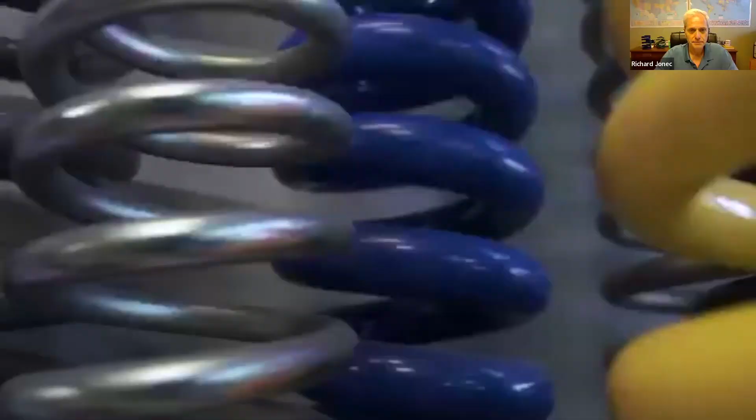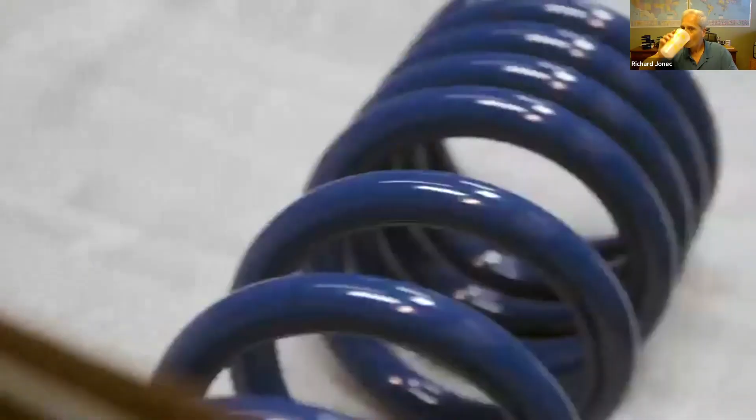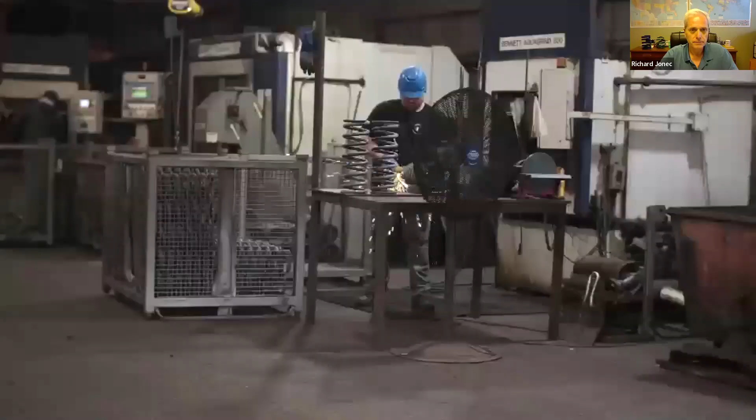With the experience and expertise to design and engineer custom springs to meet their customers' specific requirements, the next company we visited provides a level of service that is unparalleled in the spring industry. To learn more, we visited Houston, Texas, and met with Coiling Technologies. Established in 1976, Coiling Technologies utilizes reliable, fast, and cost-effective technologies to design and engineer custom springs. They can also assist in choosing the best material for your specific application.

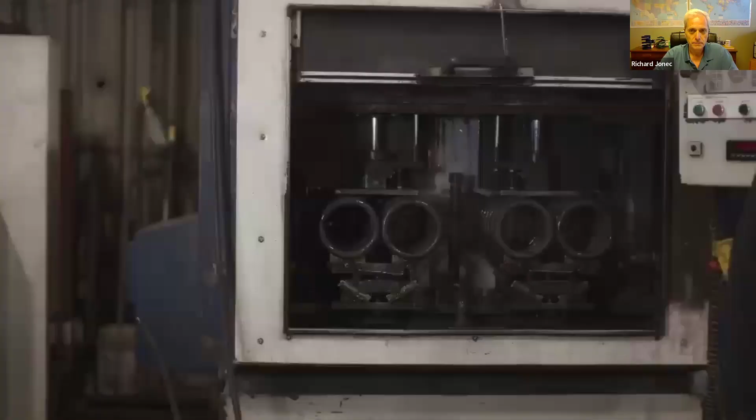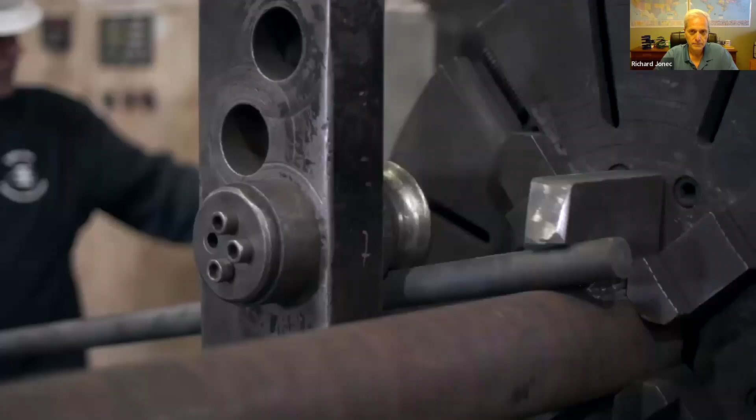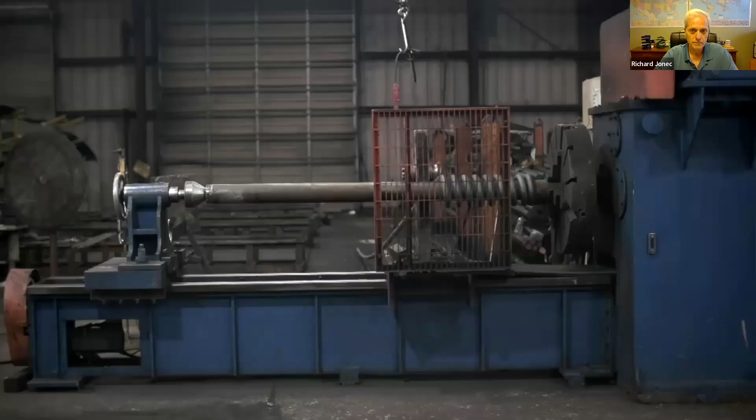Hi, I'm Roger Holman. I own Coiling Technologies. We are a spring manufacturer located in Houston, Texas. Family business has been around since 1976. Our company supplies springs all over the world, in a wide range, from small to very large bars. We service industries that would surprise most people. We cover almost every industry in the country. Springs are in everything from small to large, things you would never think of. It's really kind of amazing, the products that we supply to people.

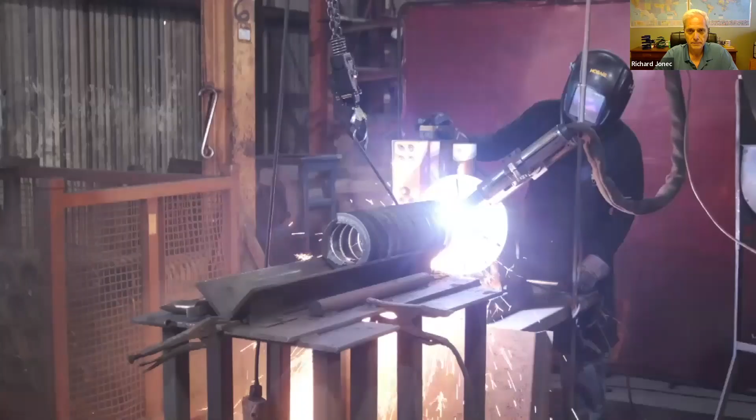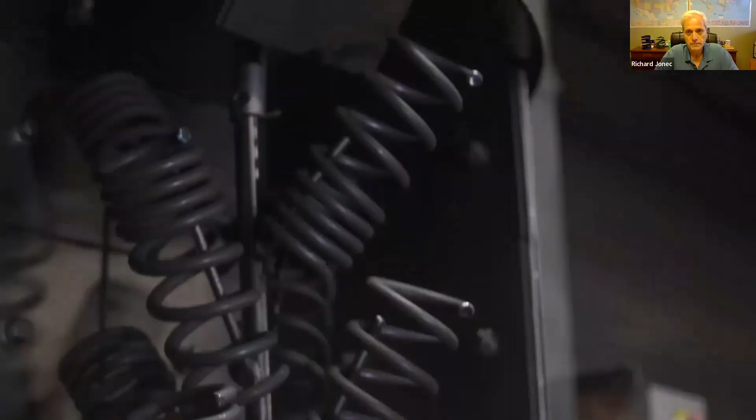Their core competence includes both large and small custom-made compression springs, disc springs, extension springs, torsion springs, and wave springs. Their quality management system is also ISO 9001:2015 certified by DNV, and their rejection rate is less than 1%.

Manufacture springs and supply springs on an OEM basis. We supply springs that are custom made, engineered in-house, designed. We provide programs to all of our customers that include Kanban, blanket orders. We provide a host of coatings and in-process adaptations that help enhance the cycle life and performance of our springs, and we provide these to all industries in the United States.

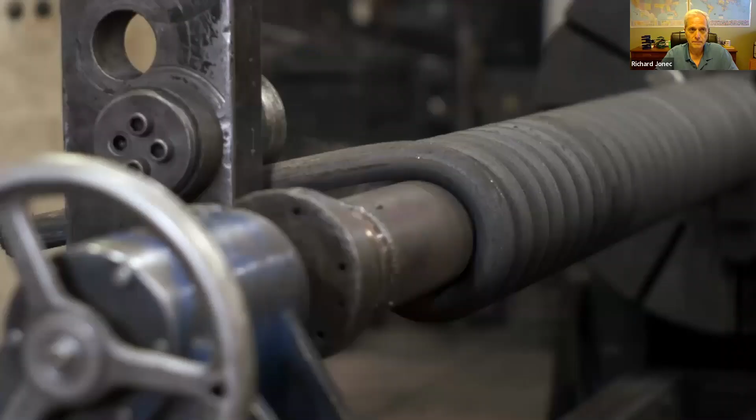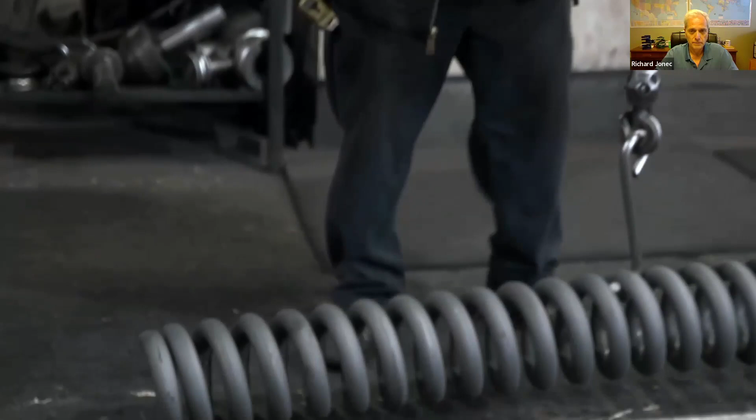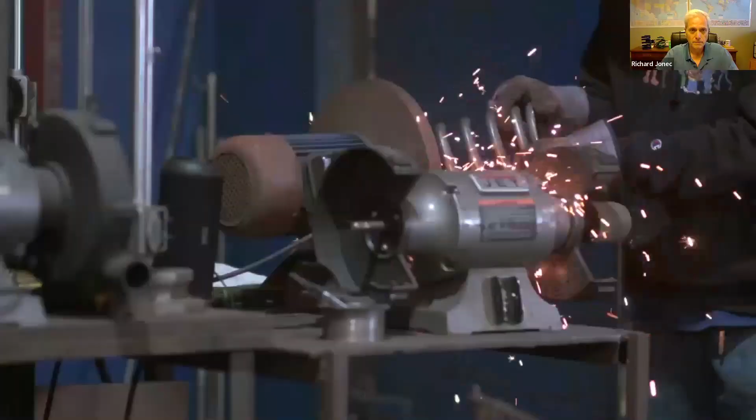Whether your requirements are for one piece or more than a million, Coiling Technologies has the capability to meet your needs. The thing that makes us probably the greatest is our ability to cold coil bars up to 2.5 inch. We developed that process over the last 25 years. Cold coiling means we actually coil the bars at room temperature versus putting them in a large batch oven and heating them up to 1500 degrees and then coiling them while they're hot. So we were required to develop specific equipment that could handle those stresses, and we were able to overcome those.

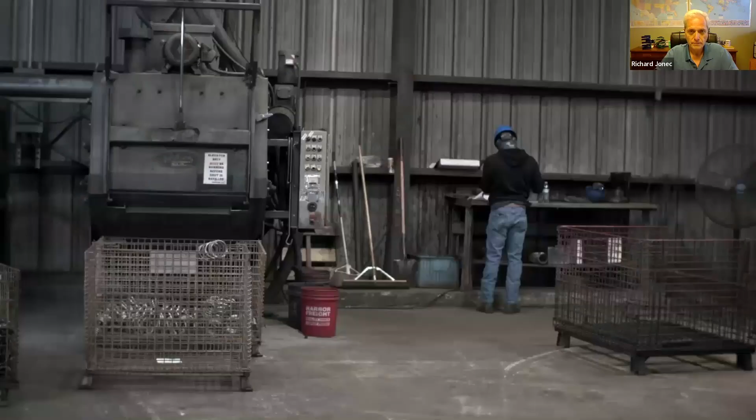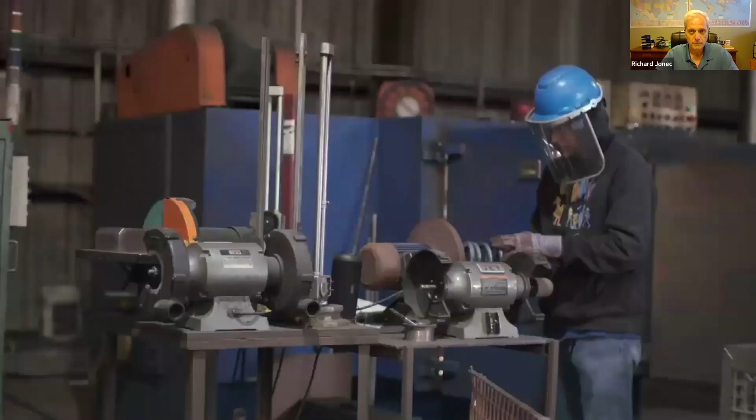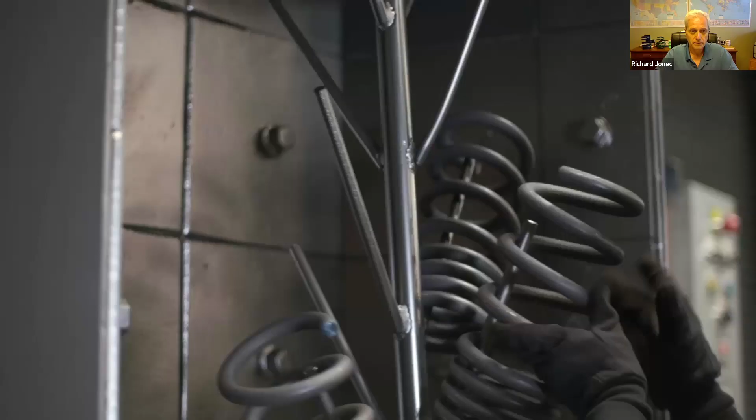In the end, we feel it provides a better product. It allows us to run a lot tighter tolerances, and allows us to batch heat treat all of our parts and get a lot better hardness ranges, so they operate a lot better. We're currently the only company in the United States that can coil bars that large, and it really sets us apart from all of our competitors. By manufacturing compression springs that meet your exact specifications and perform in the most demanding and challenging industrial applications, Coiling Technologies is truly one of the world's greatest.

Wow, Richard, that was tremendous. Seeing them formed, the old 'a picture is worth 1,000 words'—well, a video like that's got to be worth hundreds of thousands of words. I know we're speaking to a motorsports and automotive-centric audience, but there are so many people involved in our passion of motorsports that are in industry, in oil fields, in so many different fields that could potentially be reliant upon this technology.

Yeah, absolutely. And that's what makes it quite unique—as a company, we're not just focused in one specific industry, let's say motorsports. We're focused in all varieties of industries, and that gives us an opportunity to share that information and have that crossover from one industry to the next. Many automotive OEMs are doing things now in concert with a lot of the motorsports industry, so you see that transition where they're taking from one sector right to the other.

So you're either having a transition of information from what you've learned on the racetrack to the OEM, and vice versa—you have the OEMs feeding right into the motorsports community and providing them the expertise necessary to be better. I have a motorsports background, going back many years and decades that I was directly involved, but it was quite a bit different than it is now. Back then you didn't have a team of engineers, you didn't have all the direct support that was going on. You had maybe a transfer of some information, maybe aero, those kind of things, but now it's fully integrated and it's harmonious.

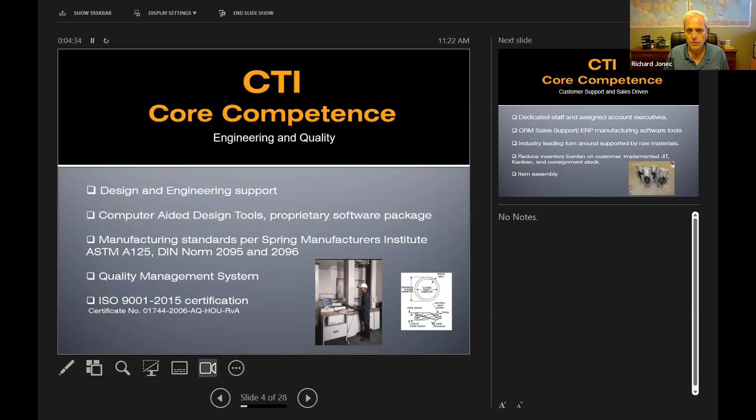We have a full quality management system in place. We're ISO certified, so it's something that people can be rest assured that you're going to get a quality product.

Some of the things that we do is we have a dedicated team, specifically people who are involved in various sectors to support our customers. So we have an individual like Troy who's responsible for supporting our Emerson account, and we have Veronica who supports a lot of our smaller customers that are basically job shops. So each individual person within the group is able to help and support our customer base as they need to be.

One of the things we talked about is having that raw material on hand, ready to go, so we can make a spring quickly. It's not as common for us to make a spring within days as such. Now we're doing higher volume, so it typically is in the weeks and maybe months, depending on the application. But every now and then, we still get a customer who has, let's say, a plant that could be down because a valve needs servicing or what have you.

So we still have that opportunity to go and crank out a spring within 24 hours. You're going to pay for it - it's not going to be a cheap way to do it. But the bottom line, we're able to do that, and the industries have matured, so they have the inventory and stock in place to support that. But 20, 30 years ago, that was a very common theme for this company. So we still have that background - if you need something quick, we're able to do it.

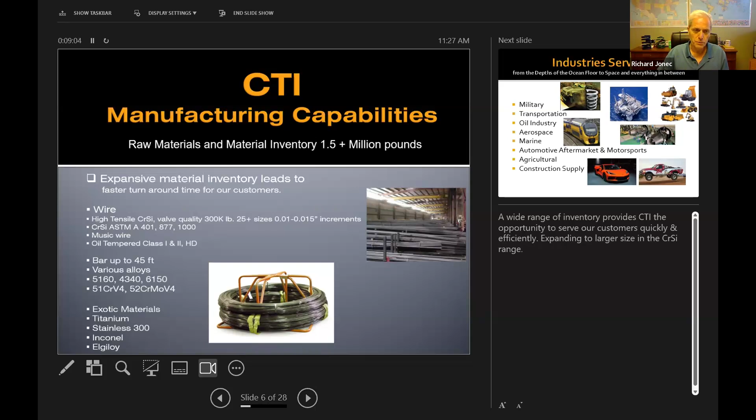So here's some of the industries that we serve, so you can get an idea what that's all about. But at the end of the day, if you look at Coiling Tech, you're going to see a company that literally has springs at the bottom of the ocean floor to potentially out in space. And we know at some point they're going to be out in space, because we have a program that's going to be for the mobility vehicles that go on the lunar surface. So we have some exciting things we're working on.

So just to give you an example, we made springs for Alvin, which is the deep sea submersible. They did an upgrade of that submersible back in '22, so there's some unique special nickel alloy springs on that vehicle. And that submersible can now go down to depths of over 21,000 feet.

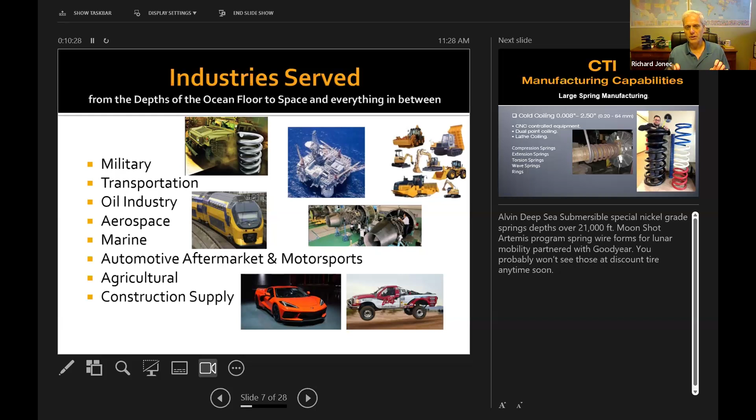Whereas we have a project in conjunction with Goodyear - we all know who Goodyear is and what they're all about. At some point, you're going to have vehicles that have to be on the lunar surface roving around, so we have some exotic material spring applications on that in the future. We're really excited about that. So at the end of the day, we serve all these various industries, and that's what gives us that unique approach for being able to solve your spring needs.

So we pride ourselves on our large spring manufacturing, and I mean large springs. We make large springs. Here, our senior project engineer is standing inside one of the springs we made for customers that needed a large actuation. These go into actuators. And then he's holding an itty bitty spring just to give you some scale and reference to what our capabilities are.

So it's not just large spring manufacturing, we can do everything kind of in between. Everybody kind of has a niche. So if you're looking for super high volume, lights out manufacturing for small itty bitty springs, that's not what CTI is all about. But we certainly have that capability and can support just about anybody with a spring need.

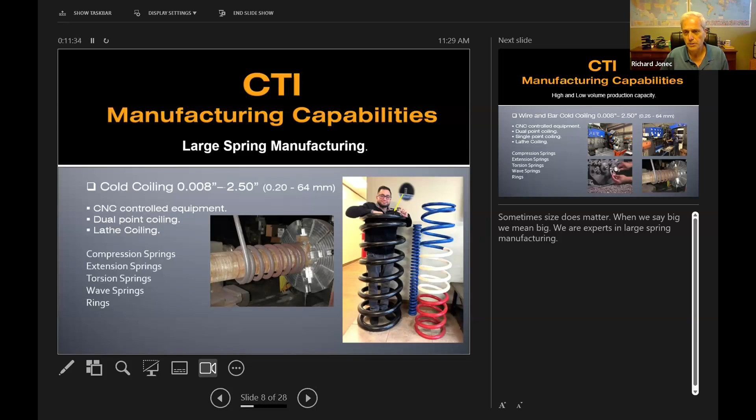So this gives you some idea of what type of coiling operations we have. We have all CNC controlled equipment, but we have dual point coilers along with lathe coiling equipment to produce these large springs that you're seeing in this image and photograph.

So the next area that we've had a fair amount of CapEx recently in the past 18 months, close to approaching $3 million, is our large spring coiler. We now have a 25 millimeter coiler that's been online. Basically it can coil up to 1 inch diameter material. That's a unique piece of equipment. We're really excited to have it because it gives us a lot of opportunity to go beyond a simple lathe coil application.

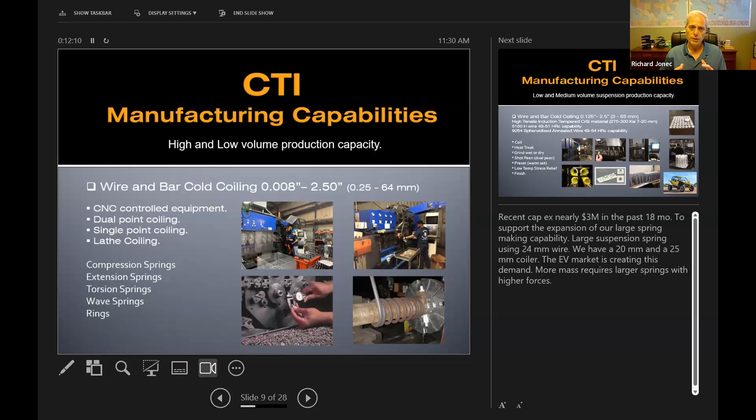Instead of a simple lathe coil application, we now can make unique spring applications. So Carla's out there, she says this is very awesome and very interesting. So cool, we're hooked.

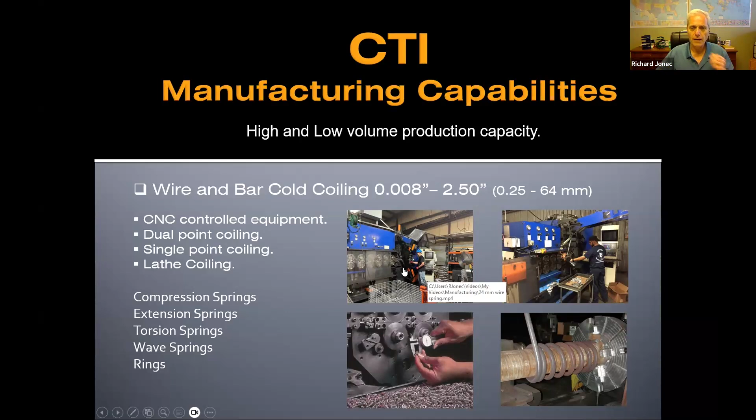So anyway, that touches on the various aspects of our spring making capabilities. Large bar on the lathe coiling you see in the lower right corner, and in the upper left corner you see the large 25 millimeter coiling machine. The primary difference between those two is that a lathe coiling machine typically uses an arbor - that's the typical hot forming you might see, but we converted that over to cold coiling technology. In the upper left corner, you see the big large coiler that allows you to coil different spring configurations, whether you need special ends, pigtail ends, barrel shaped, hourglass, what have you. It gives you a tremendous degree of freedom on the coiling side.

The next slide gives you an idea about what type of volume manufacturing we do for the suspension market, and it's low to medium volume. What we mean by low and medium volume: you want 2 of these for prototypes or development, we can do that, no problem. If you want several 150 pieces, we could do that as well. Or if you need volume in the thousands for niche vehicle programs that we're involved with. Just to name a few, we support the Z06 Corvette, and we manufacture the springs for those.

Pretty exciting. We run through the whole gamut of that process, starting with the coiling process. We're taking that raw material, coiling it, and immediately stress relieving it in this case. In other cases, when you saw that orange glow coming out of the oven, we're actually heat treating the material, taking soft material and turning it into hard material by heating it up, and then we quench it in oil. We have everything like that all in-house.

But in the typical process of taking chrome silicon materials, we just have to stress relieve that. We don't have to do anything in relation to actually heat treating the material. Then obviously we go through a shot peening process that's going to improve the fatigue life of the spring. We go through a presetting process to ensure that the spring won't take a set during operation and fatigue. And then of course, we have all the technology to properly inspect and evaluate the spring to ensure that you're going to get the product that you expect. And then finally, we'll finish the product and paint it in the color of your choice.

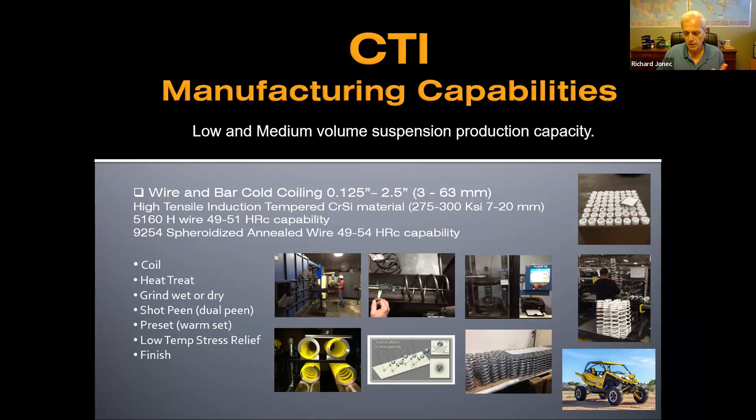Another unique aspect of CTI outside of our suspension manufacturing is also the ability for us to do low volume production in unique wire forms and shapes. This goes beyond what you might see from a standard coil spring. We have wave spring capability, wire forms, we have stampings, but this is all low volume support. So we're really an ideal candidate to help you with those kind of specialty applications.

Just to give you an idea, we have the capability of making a wave spring about 36 inches in diameter. So that allows us to use exotic materials, going into big, large applications like a ball valve or moving fluids in a power plant or moving oil through pipelines, those kind of things.

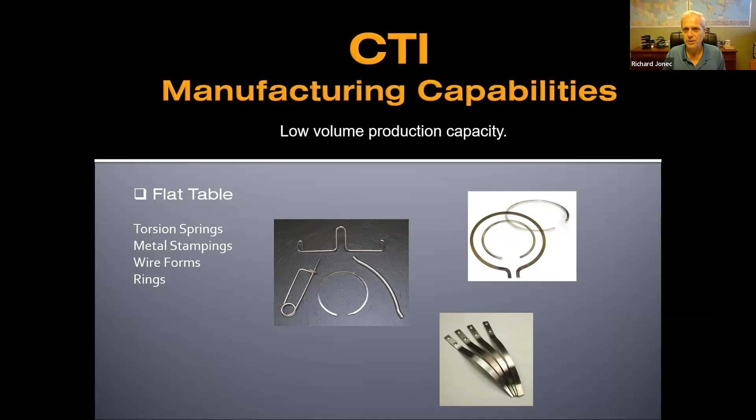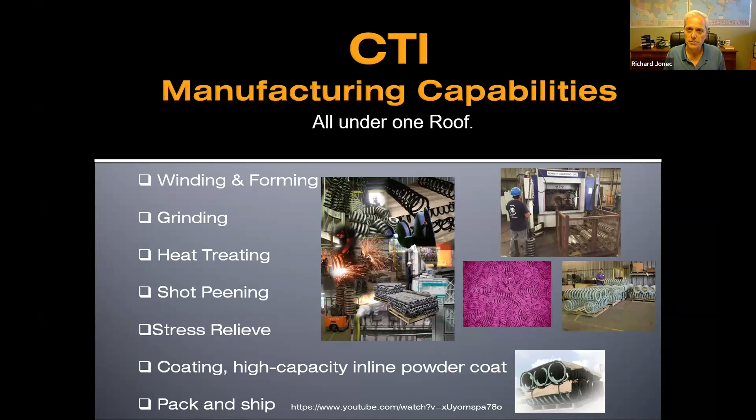Like I said, everything's done under one roof. We cover everything, all aspects of manufacturing. The only thing we really don't do internally here as a company is any special plating or electropolishing, those kind of things. That takes place with vendors that we have as our partners.

So one of the things I wanted to touch on is discuss and review how we go about dealing with our customers and how they can come to us and request a custom spring. One of the things here, obviously we talked about earlier, is there's a myriad of ways people can contact CTI and have a conversation with us and start that process.

Number one, give us a call. If you want to email us, send us prints. If you want to chat with us, we have all those things in place to be able to communicate with our customers as needed. One of the things that's ideal in working with CTI is that we can provide support. You can come to us with an already existing need. If you have drawings, we can bid that for you as necessary.

But really, if you'd like, leverage us, leverage our capabilities. Come to us early in your design phase. I always have that conversation with our customers: when you have a project, come to us early so we could help you how you would package that application. So those are some of the methodologies we follow.

I like to highlight that if you have a keen interest in having a better understanding about springs, especially if you're an engineer and you don't know too much about springs but know a lot about another application—maybe internal combustion, or you're a robotics guy or what have you—go ahead and reference SMI, which is the Spring Manufacturers Institute. They have great literature and information on spring design. And then there's also Mechanical Springs by Wahl. I want to make sure I reference those, because I'll be showing you some of the information and reference material that was provided, utilizing those.

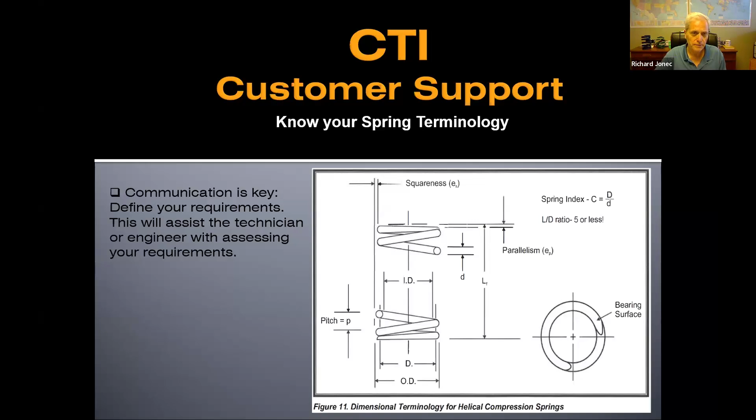So I want to touch a little bit on theory here. I don't want to get too techy in this thing, because I don't want to put people to sleep. But at the end of the day, what I found in motorsports, and certainly earlier on - maybe things are changing and people are becoming a little bit more educated - but it's about spring rate.

Everybody talks about rate because a lot of the community has the opportunity to purchase springs that are already in a catalog. So let's say they're a 12-inch coilover, 2.5-inch ID, 300-pound rate. And that's kind of like a system of how things are measured, which is all great and fine.

But a lot of people will say, hey, my spring can lose rate. Well, a spring doesn't lose rate - it's not really possible, not physically possible - but a spring will lose load. So understand that terminology, because really the only thing about spring rate is it's just a methodology to evaluate a spring and evaluate that rate curve, what that's going to be between two points.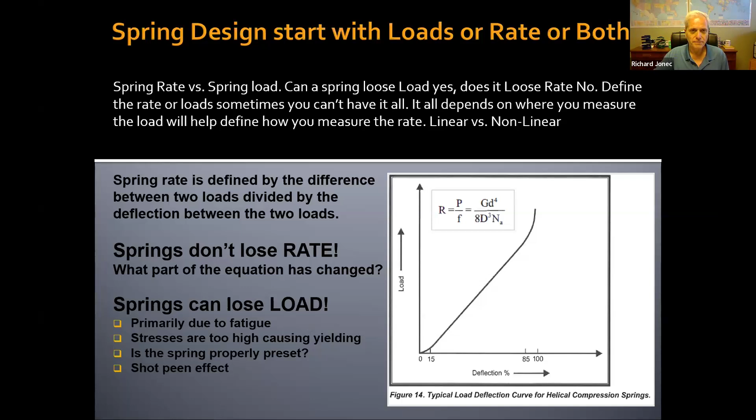But anyway, I think that hopefully shed some light. So we'll move on to the next slide. It absolutely shed some light, at least for me, and I know everybody out there comes to these seminars to learn something like you just put forth, so I appreciate that. Okay, so I know we're starting to run a little short on time, so I'm going to try to get through this as quickly as possible.

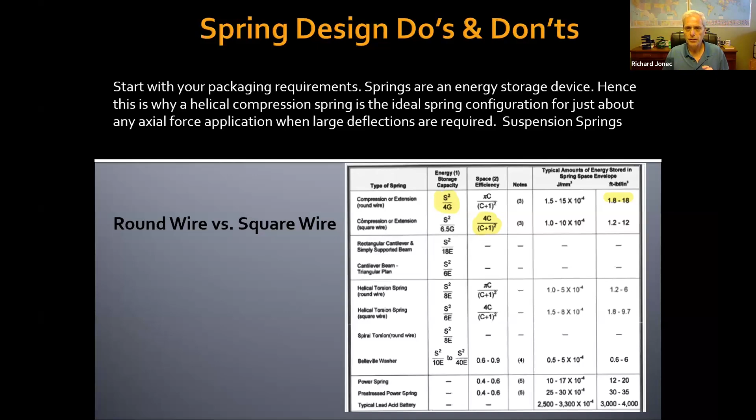So there's always the round wire versus square wire question. I always want to point out that a helical compression spring typically provides the most amount of storage for a spring that has high deflection. These equations give you a rundown and opportunity to decide the best way to utilize the right materials for your particular spring package. Round wire provides the highest storage capacity, but for space efficiency you might need square wire - that's why you'll often see a helper spring, sometimes called a tender spring, using a square wire or rectangular cross section.

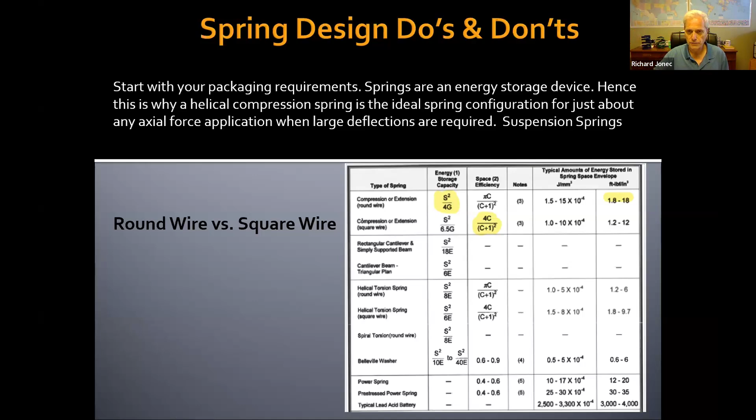Another important thing is maintaining the spring index in a reasonable range. Extremely large spring indexes above 14 create fabrication problems, so stay away from that. You want to be no less than 3 typically, because then forming stresses are very high, and from a packaging and coiling standpoint it could be a problem - that's where hot forming is your friend. Hot forming and cold forming go hand in hand in various ways; we've just evolved our cold forming to that next level. So keep your spring index in the 4 to 8 range so your corrected stresses aren't too high, since stress is a key component in making sure the spring operates for the life of the application.

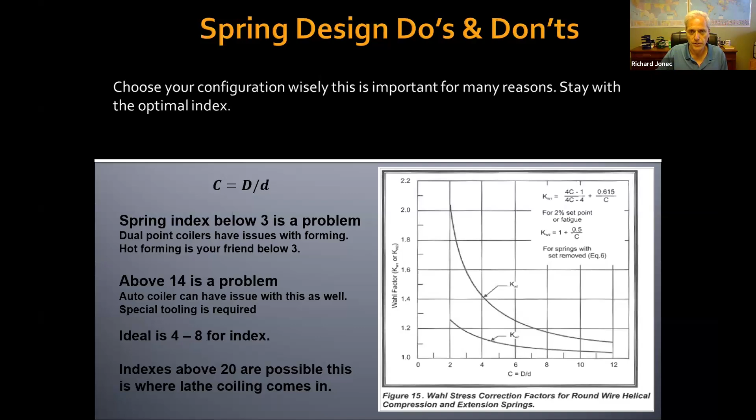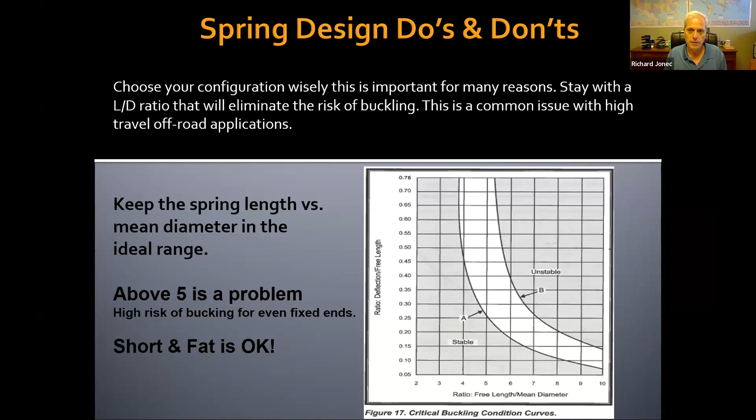Another problem we see a lot in off-road applications is everybody wants extremely long springs for long travel suspensions. It's really important to keep a spring from buckling, so you want to look at the L over D ratio - L is length, D is that mean diameter again - length divided by mean diameter. The longer the spring, the more tendency it has to buckle or bow, which can be a problem especially in a coil-over shock assembly, where you don't want the shock and spring to strike each other as they move through function. So in this case, short and fat is okay.

Then you also have options depending on the spring configuration. You can have open ends, closed ends - it just depends on the application. In most instances, everybody sees a closed and ground spring, whether it's an internal combustion high-speed valve train spring or a suspension application - that's the most common. But if you need more unique packaging, you might have to have pigtail ends. Having that autocoil equipment gives you the opportunity to create a spring in almost a myriad of configurations.

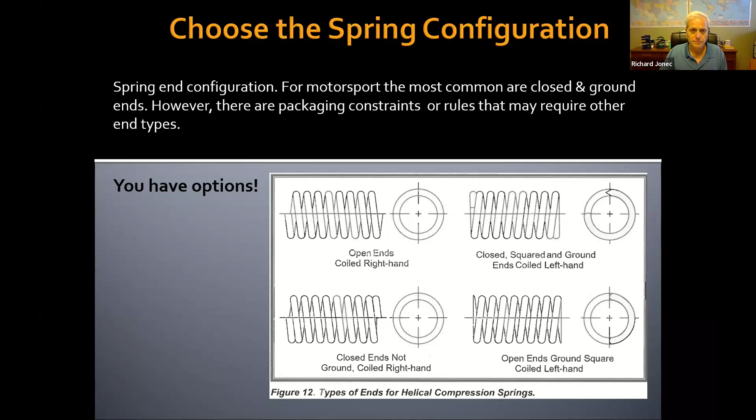And then, of course, there's the right-hand rule - technical jargon going back to first year engineering school. You can have left-handed wound or right-handed wound springs. Typically, the industry standard is right-hand wound. But sometimes if you have to nest a spring where you have one spring inside the other, you're going to have one counter-rotating spring to the other.

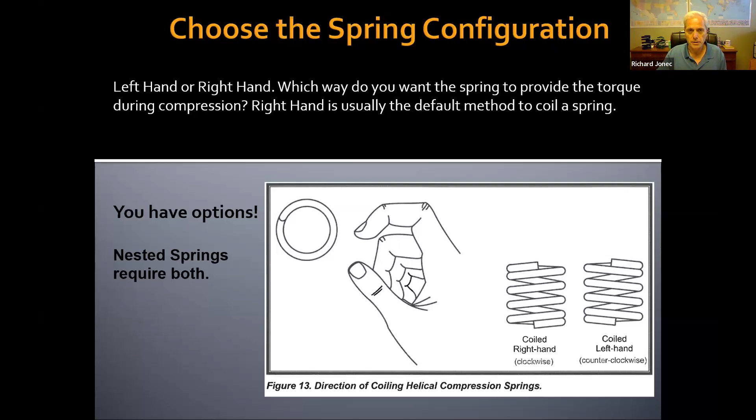So in a coilover application, it really doesn't matter. But what does matter is the spring will provide some form of torque as it's being compressed, so it may matter depending on the application. It depends on the threads on your valves and your damper assembly. It's possible that when the spring does compress, it's going to provide a torque and cause some rotation - keep that in mind on your particular application. So that's another thing to address, letting people know what direction you want your springs wound.

We want to touch on the material again a little bit more in detail. The high tensile chrome silicon materials are what we use predominantly for suspension applications.

We use alloys and materials that are globally sourced. We really focus on only premium suppliers. So we have domestic suppliers, suppliers from the EU, suppliers from Japan, and we also have suppliers from South Korea. Having that wide range of suppliers keeps us having the best materials available for our customers. Each region has developed a material that is unique to their standards, and some of the best materials come from Japan and Korea - South Korea has some wonderful materials.

So we utilize options and suppliers that can provide us the best material possible to ensure that you're going to get the most lightest available spring package based on stresses. And in some of these high tensile grade materials that are induction tempered, it's not out of the question to see material tensile strengths as high as 300 KSI.

It's kind of one of those things - a lot of times people will say, hey, can you make a titanium spring? It's like, yeah, I'll make you a titanium spring, but pretty much the best titanium material out there is going to hit about 180 KSI. I mean, I can make your wire diameter smaller, I can make your overall package smaller, I can get you pretty much to within probably 5 to 15% of a titanium spring in mass, if you're allowed to package it accordingly. So keep that in mind.

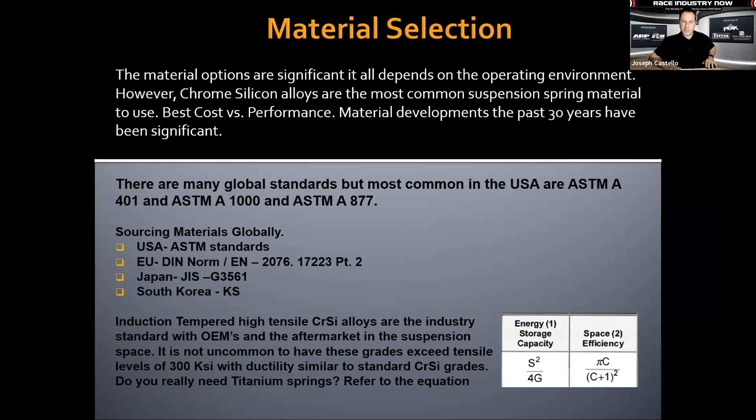So anyway - amazing, Richard, we just got a couple of moments remaining in today's webinar.

I find it like there are so many people out there that are, I've got to be inspired by this. It must be very cool to go to work for you every day, being able to touch all these different industries and see what's going on.

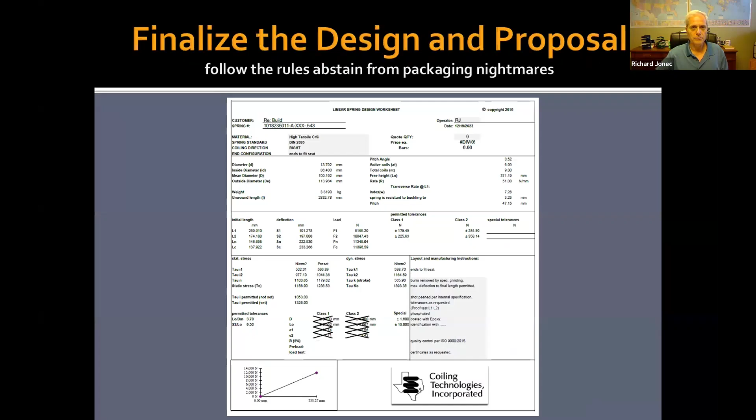Sorry, ran over it. I didn't realize all these slides would run over that far, but got a long way today. But everybody can get us at our phone number. Everybody can get us on sales@coilingtech.com and chat with us if necessary. Yeah, you do this all the time. You live in this world. To those of us who receive the benefits by being involved in motorsports or enjoy racing, or certainly love the idea of high performance and know that the only reason it happens is because of the industry and the business to business relationships behind it, I found it very interesting. And I'm very excited for what you guys got going here right in the United States of America. Although we are a worldwide product, Houston, Texas, you guys are doing a lot of great things down there. And I was just excited to learn about it.

ePart Trade is a digital platform that we've created basically to make life easier in the business community of auto racing. On ePart Trade, there is no e-commerce. It's literally a connection just like at a trade show. So now, any time of the year, a buyer could reach out to a supplier. When you see a product that you're interested in, all you need to do is click on request more information, and then from there, it is forwarded directly to the buyer or to the supplier. ePart Trade really eliminates having to travel, closing down your shop. Now you have a place to showcase globally your racing product and technology.

Land speed record holder George Poteet's Speed Demon rocketed 481 miles per hour at the Bonneville Salt Flats. You don't go that fast without ARP fasteners. There is no way that we could go the speed that we've gone, the number of times we've gone, with a lesser quality bolt than ARP supplies to us. And we absolutely wouldn't be where we were today if it weren't for ARP. When failure is not an option, it's ARP.

ARP-bolts.com. We're Performance Plus Global Logistics. Our team of dedicated performance industry and logistics experts get valuable cars and components to the track on time in top condition. We provide expedited logistics solutions for the performance industry using direct routes instead of deferred options, and communicate all necessary information to the appropriate resources to meet regulations and ensure a smooth transit and secure delivery, both domestically and internationally. And we exceed customer expectations by providing best-in-class service with an efficient and cost-effective system in place. Contact us today to book your next shipment.

You work as hard as your truck, and you have no time for downtime. That's why more truck owners trust Blue Def, America's #1 diesel exhaust fluid brand. Each batch is guaranteed pure, so you can avoid costly repairs caused by inferior DEF. Demand America's best for your truck. Blue Def and Blue Def Platinum. Put trust in your truck.

With roots in the Midwest that date back well before the Model T, Fifth Third Bank has a long history of serving the needs of automotive companies. While much has changed over the years, our passion for helping businesses put cars on the road and on the track has not. Today, we are more committed than ever as a member of SEMA, a founding member of PRI, and a sponsor of multiple race teams across several racing series. For over a decade, Fifth Third Bank has been a staunch supporter of our industry and a great partner for many companies in the motorsports field. Our business has been growing extremely fast, and really we could not be where we are today without Fifth Third. They provided amazing strategic advice, the capital we need to support our phases of growth. They are true partners for me now, and what they do with their involvement in motorsports is untouched in this community. Where can we take your business? Fifth Third Bank.

Where will you find Ferrea racing components? Circle track, drag racing, and any top race shop. In every form of motorsports competition, our valves and valve train components deliver race-proven design and technology. And we've brought that same performance to our street applications as well. We're backed by 5 decades of experience, an extensive range of off-the-shelf components, and our custom valve department has the fastest turnaround times in the industry. Ferrea Racing Components. Stand with us or race against us.